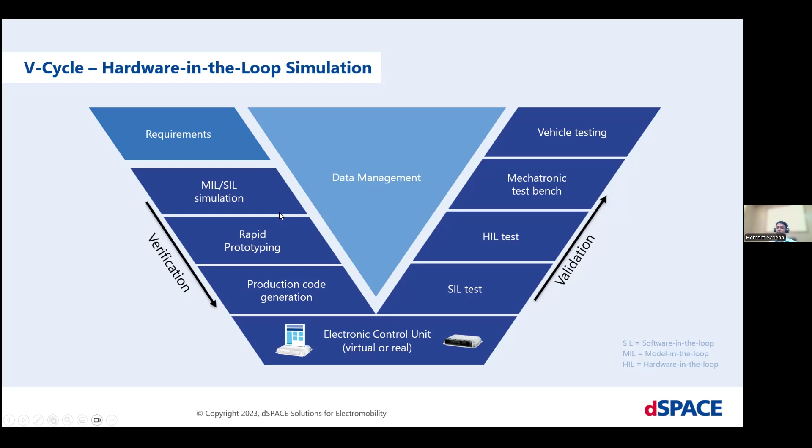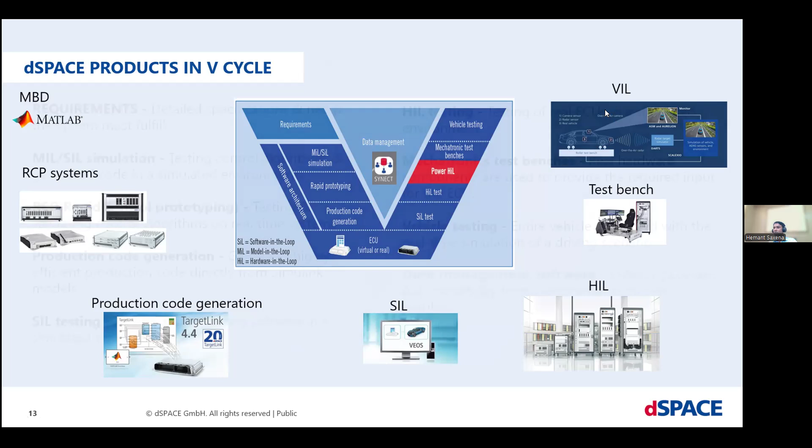Okay, hold a second. So first, what is the difference between MIL, SIL, and PIL? MIL stands for model in the loop, SIL stands for software in the loop, and PIL stands for processor in the loop.

This is usually done in simulation software. For this presentation, I am considering MATLAB Simulink, where both the controller and plant are available as Simulink blocks. When going for SIL, software in the loop, once the controller function is ready, you generate the code and run the controller in code format, while your plant model runs in simulation using the Simulink block set. That is called software in the loop.

In processor in the loop, your generated code is dumped onto an evaluation board, and the plant model is simulated on your PC. So depending on MIL, SIL, or PIL, your controller runs differently. That is the basic difference between MIL, SIL, and PIL.

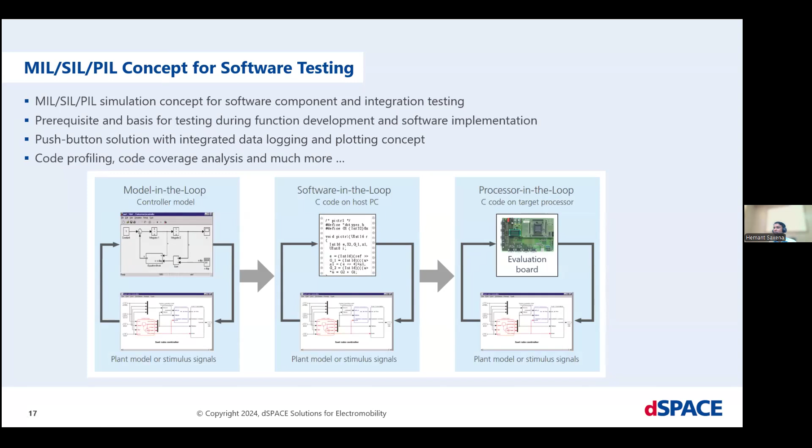I already explained MIL and SIL simulation. In RCP, rapid control prototyping, we test and validate the control algorithm. Suppose you want to run an inverter - it requires 6 PWM pulses for a 3-phase inverter, generated by a real-time system. So you run your controller in the real-time system with physical hardware present. That is called rapid control prototyping.

Then there's production code generation, where we generate C code for the ECUs. That is production code generation.

As I already explained, HIL testing is for testing purposes. Your controller is with you, but the hardware may not be available, or you want to test your controller within a safe environment. Suppose in a voltage source converter there is a DC link issue, like voltage dipping due to wrong switching operation - if you test with real hardware there is a safety issue and it can damage your hardware. But with HIL testing, there is no safety concern.

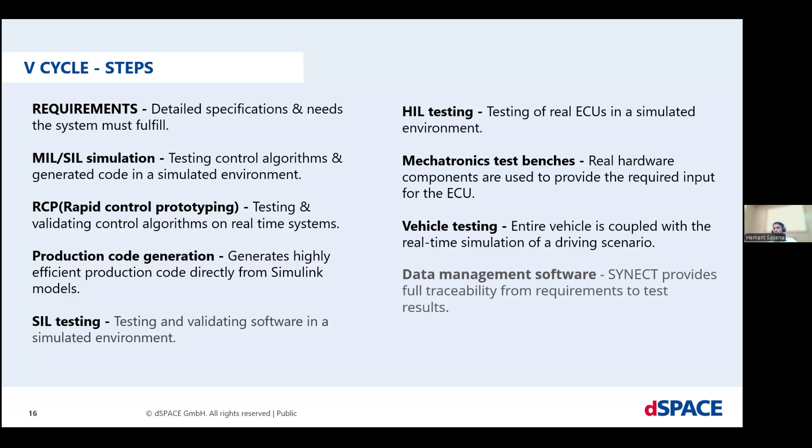In mechatronics test benches, real hardware components are used to provide the required input for the system - some part is simulated and some part is emulated with real hardware. In vehicle testing, the entire vehicle is coupled with a real-time simulation of a driving scenario. This is generally used for autonomous vehicles - the vehicle sits on test benches, and we create environmental scenarios so it can be tested in the lab itself.

Now coming to e-mobility, there are some identified trends. One is increasing power density - previously we used silicon-based switches, now it's changing to SiC based, and then to GaN based. So power electronics hardware or switches are becoming smaller in size with equal or more power.

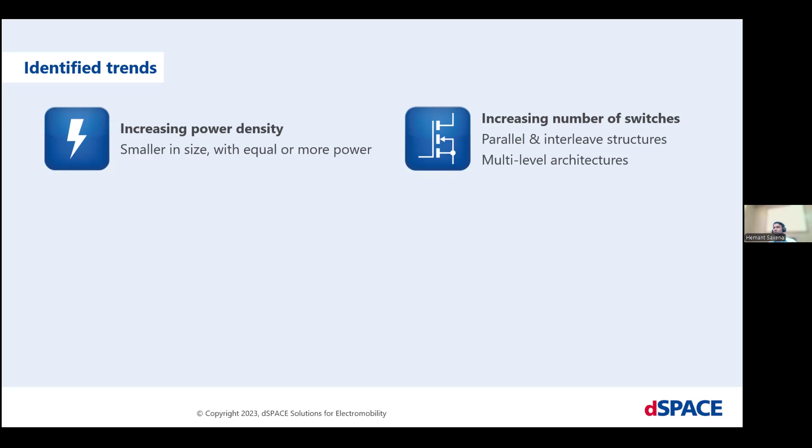Another trend is increasing number of switches. Those of us working in power electronics are developing new topologies, and with these new topologies there may be an increasing number of switches compared to standard inverters - like parallel and interleaved structures or multi-level architectures. Also, with advancement in material technology for IGBTs and switches, for DC-DC converters we are going beyond 200 kilohertz, while for drive inverters it's around 20 kilohertz, and the DC link voltage is increasing, maybe going beyond 1000 volts.

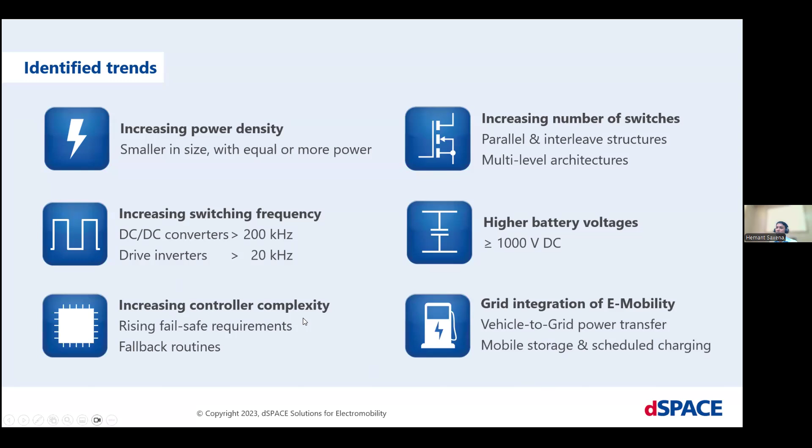Increasing controller complexity. Day by day controller complexity is increasing. So for that, we have to work on the rising fail-safe requirements, fallback routines, and there is a grid integration of e-mobility, like vehicle to grid or grid to vehicle.

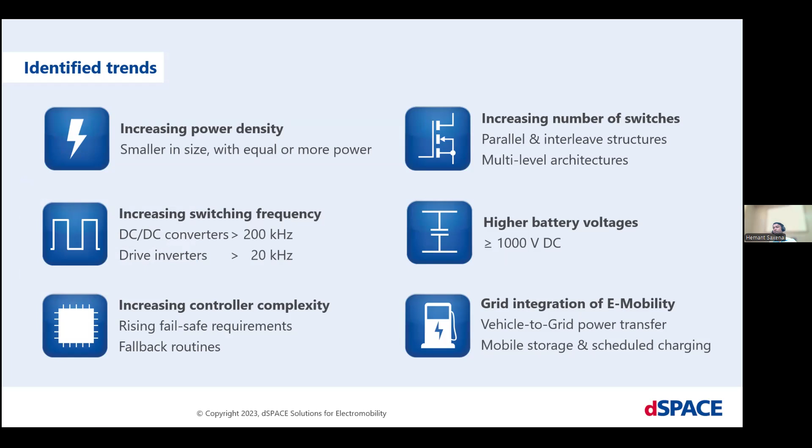These are the new identified trends industry is working on. Now I have discussed MIL, SIL, and other things. Now we'll discuss more about RCP.

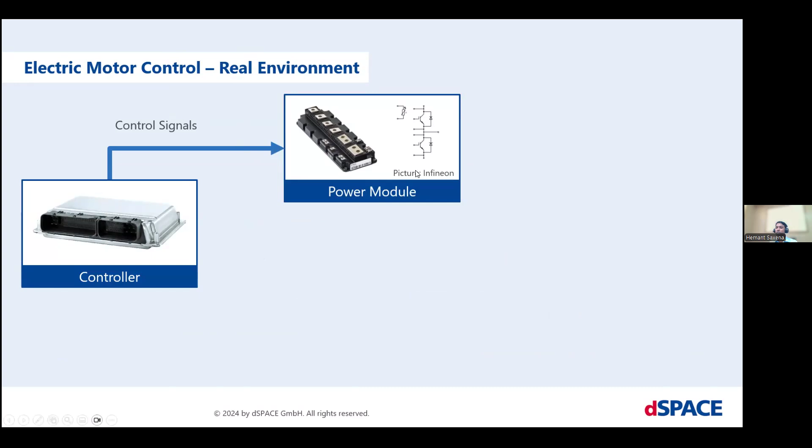Suppose I am taking one example for electric motor control. The real environment will be like there will be one controller which will generate control signal for your power module. It will be PWM signals, and it will control the voltage and the current, and then you can run your motor. Running the motor, you can detect the current and the position of the motor using sensors, and the measured signal will be given back to the controller. So this is the real environment for running a motor.

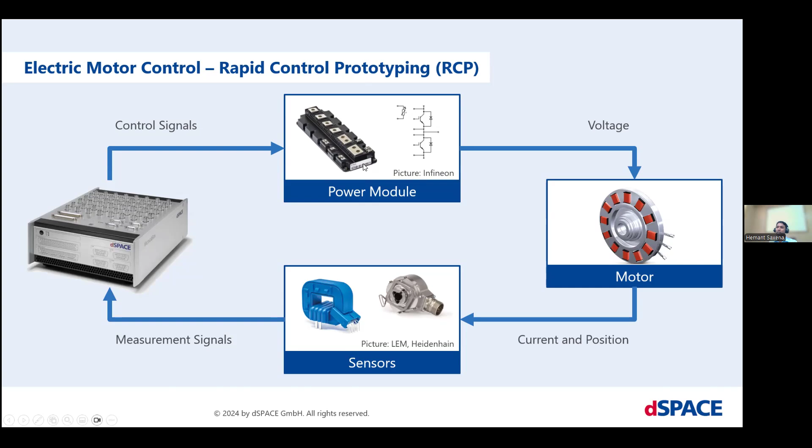But now what is happening here? We are going to simulate the controller model in real-time systems, maybe dSPACE, or others, and that will be called rapid control prototyping. In my experience in academics, most research uses these things - they develop new control logic and test their hardware with those newly generated functions.

First you are going to simulate your controller model and the plant model. If it is going good, you implement the controller model, then assign the channels like input and output, analog or digital, and implement this MATLAB model to any real-time system. Then you can load it to the ControlDesk - also our solution, the software for monitoring and tuning.

When we say monitoring, we measure the internal signal of your controller, or measure whatever output we are giving as input to the system - that we can measure also. And if you want to tune anything, you can tune it in real time. For example, using a PI controller, there will be KP and KI values, and you're not sure which value will work. So you can change it in real time and see the output of your hardware, how it is stable, whether it is working as per your requirement or not, so you can tune it also.

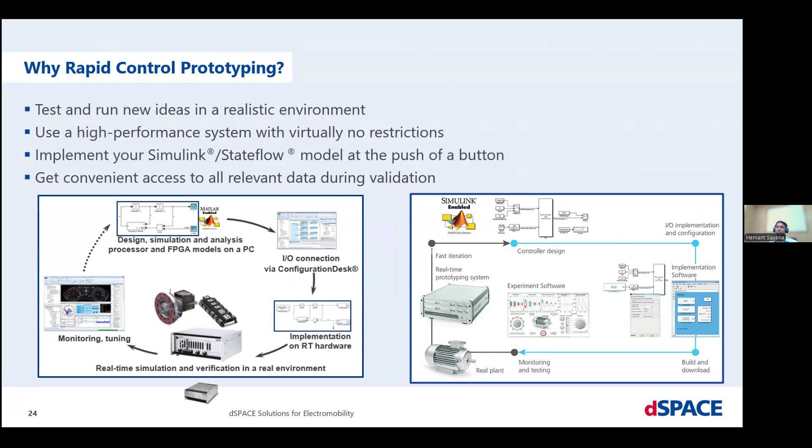Okay. I think we can take questions at the end of the presentation. Okay, that will be better. Yeah, no issue, sir, no issue. It's like in between, so that I can understand if people are getting it or not. Okay, that's okay, no problem.

This is one use case for rapid control prototyping - you can see the hardware for a three-phase active power filter, and we are going to develop some control algorithm. Suppose this is the distribution grid, and this is the non-linear load which is injecting harmonics. So how will this device help you do this?

Simply, what you have to implement is a sensor, and you should measure the source ABC current for all three phases, and DC link voltage, using sensors. This is very important, because here the voltage level may be 230 volt, DC link voltage maybe 400 volt or 800 volt, but any processor or DSP device cannot take this voltage, so you have to step it down and also isolate it. These signals are mainly analog signals, so you give them to the ADC channels, then process your control logic, and generate PWM pulses for the three-phase voltage source converter.

This is a different use case related to motor control, but in a similar fashion. You measure the voltage and current, the speed and position, and then process your logic, and it will generate control signal for your power module, which will control the voltage and current for the motor for optimal operation as per your requirement.

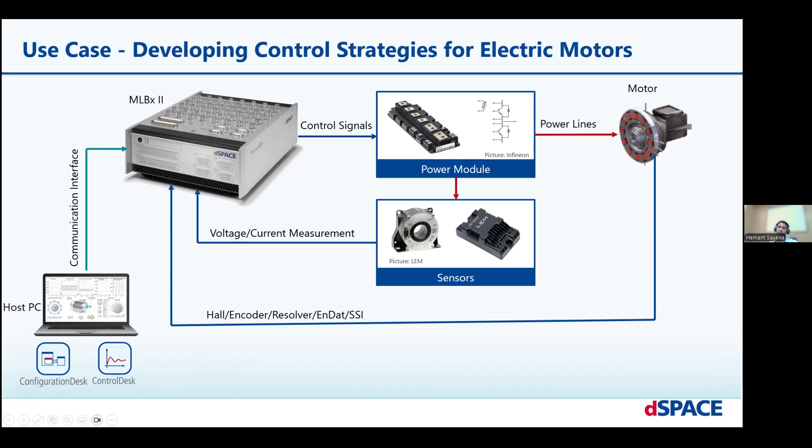Also, your laptop or PC can be connected to the MicroLabBox for monitoring and tuning purposes, or for controlling purposes, and also to do the channel assignment. Different channels can be assigned as per your requirement.

If we talk about the different products related to rapid control prototyping, there are different products here, like in-vehicle application or laboratory purpose. Those used for laboratory purpose can be used on the tabletop, and you can give supply at 230 volts. Those used in-vehicle will work with 12 volt or 24 volt.

What are the voltage levels available in your automobile? And those are very rugged, so they can withstand different vibrations also. So these are some of the features.

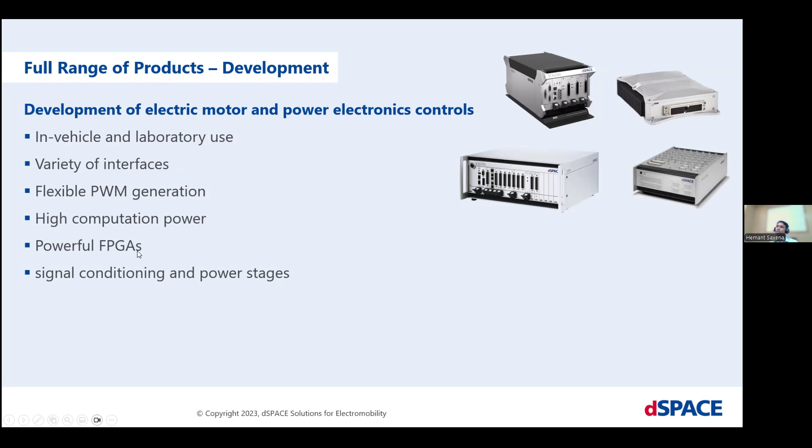For in-vehicle and laboratory use, there is a variety of interfaces, flexible PWM generation or high PWM generation can be done. Powerful FPGAs are there, so you can do very small sample time signal conditioning and power stages, and there is comprehensive software support to do all your operations.

If we see the different hardware and software, for the hardware side we have real-time hardware, and for signal conditioning we have RapidPro hardware. The voltage range is 6 volt to 30 volt, and it can go up to 60 ampere current, but you can stack it for a larger voltage and current range.

For the software side, we have implementation software related to managing the I/O channels. For example, the encoder generates A, B, and Z pulses, which are given back to our real-time system, and that converts them into position and speed. Also, the XSG AC motor control library and the XSG utils library are provided for implementation in the FPGA cards, and this implementation software is used for both the processor and the FPGA.

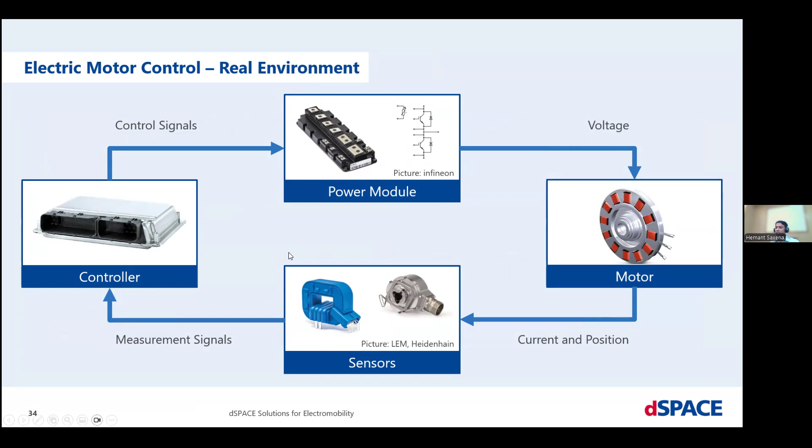Now the RCP part has been completed. Now what is hardware-in-the-loop testing basically? If you come to the real environment, again it's a similar thing, but this time you simulate the power module, simulate the motor module, simulate the sensor module, and your controller will be real, so that you can test your final controller, the product-ready controller, without any safety issue as per your desired test conditions.

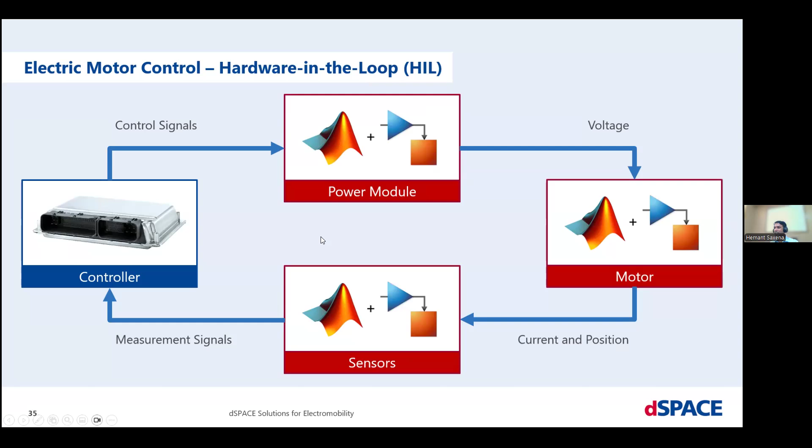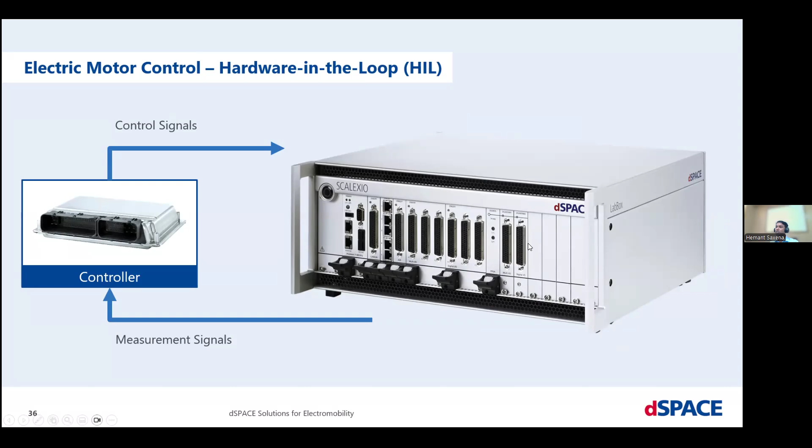So this is the Scalexio system. It can be used for both rapid control prototyping and the HIL system. When Scalexio is used for the HIL system, it will generate the sensor signals required by the controller, and it can measure the signals generated by the controller for actuation. It can also connect the output signal of the ECU to loads to simulate the actuators.

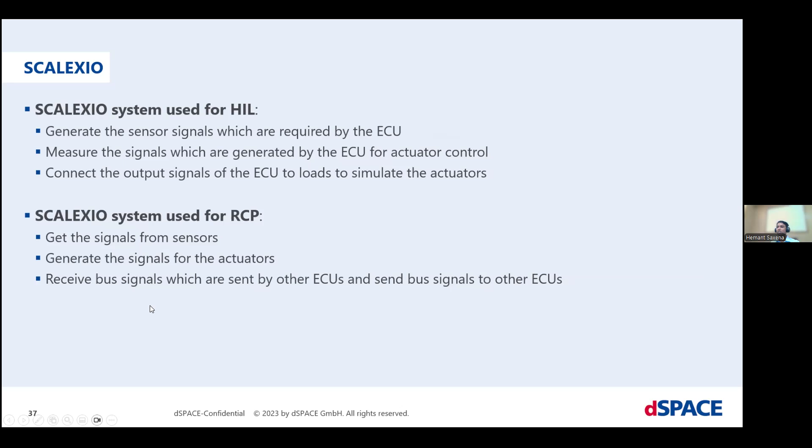In case of RCP, it will get the signals from the sensors and generate the signal for the actuators. It can also receive bus signals sent by other ECUs and send bus signals to other ECUs — in automotive, there are a number of ECUs in the vehicle, so it can simulate those too.

Now, why hardware-in-the-loop testing? You can test functions in early development stages, and tests are possible in any desired condition. For example, in an inverter case, you can do a short circuit test, or test in open loop condition also.

So a lot of things you can do without any safety risk. The tests are possible under any desired condition. Laboratory tests reduce time and cost. Tests in failure and other dangerous situations carry no risk. The tests are reproducible and can be automated.

So by Python coding, or by using different software like AutomationDesk, you can automate every test automatically. There is no need to do the manual thing. So like you are going to open MATLAB, all the things can be done by using the automation test.

Okay. So what is SCALEXIO basically? It is a modular real-time platform for hardware-in-the-loop testing and for RCP applications. It has a high performance processor and FPGA technology, comprehensive, precise and fast IO capabilities, and bus support. Bus support means CAN, LIN, Ethernet or other communication channels also.

So you can see here how the ECU testing has been done. This ECU has to be tested, so it will be connected to the different channels of this SCALEXIO system, and external loads can also be connected as per requirement. You can use your tester device to check the signals on the channels, and this device will be connected to the host PC simply by using Ethernet.

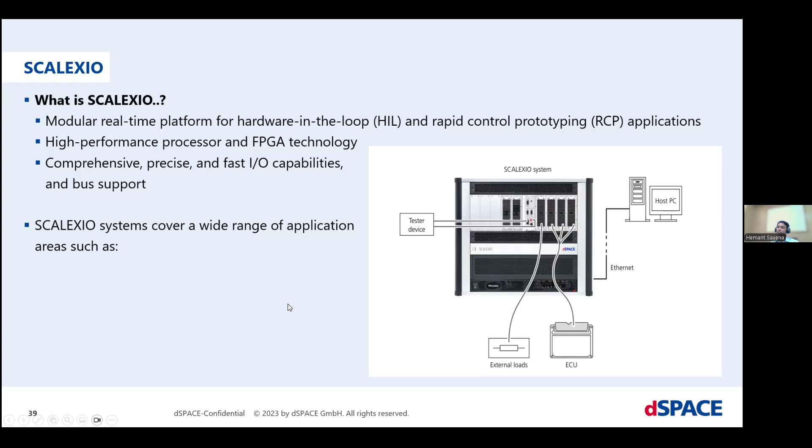Okay. So a different tool chain is used for the HIL testing. For the user interfaces, different software like ConfigurationDesk, ControlDesk, AutomationDesk, ModelDesk, and MotionDesk will be used to use this SCALEXIO hardware.

Also to simulate, there are two options here, VEOS and SCALEXIO. So your model can be simulated either in VEOS on the virtual platform, or you can run it in the real-time system, the SCALEXIO system, and its IO can be connected to the ECU. Okay, so this way it can be done by using the dSPACE toolchain. I will explain some of the software which is required for the HIL testing.

So the first software is ConfigurationDesk. ConfigurationDesk will be used for two purposes basically: first for the channel assignment, and for those channels their function assignment. Simulink, FMI, and virtual ECUs can be integrated. Simulink, like MATLAB Simulink, you can integrate. FMI is the functional mockup interface. Other simulation software can generate the FMI file that can be integrated into ConfigurationDesk.

Also, there is a provision to integrate the virtual ECU, and multi-model capabilities. So you can integrate multiple models, and also for multi-processor systems, if you want to integrate some model in one processor and some model in a different processor, that is also possible. Better overview, multi-selection: you can select multiple channels at a time and assign their functions at a time also. You can see every channel, where it is connected, and what the configuration for those channels is with ConfigurationDesk.

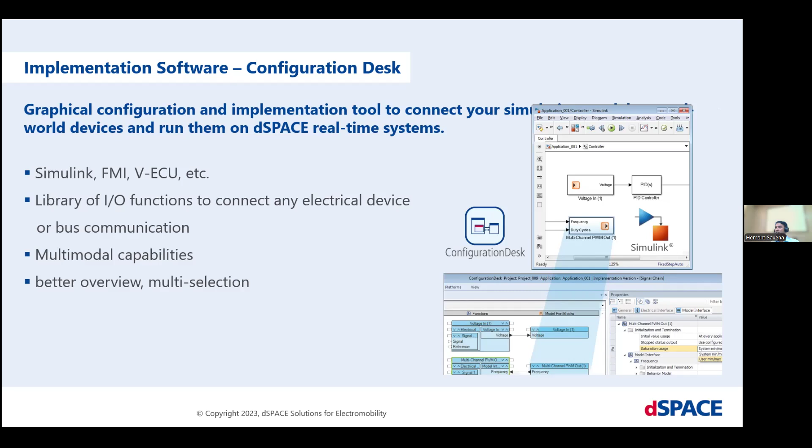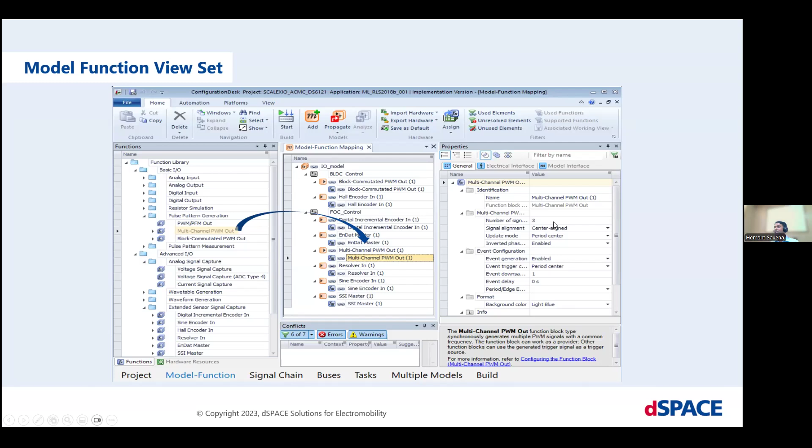Okay. So here is some view of ConfigurationDesk. Here you can see there is a function list. For basic IO, maybe analog input, analog output, digital input, output, resistor simulation, for PWM generation maybe the PWM generator, or you want to generate multi-channel PWM. So there are a number of functions available, and these functions can be assigned to specific channels. If you want to see the properties, you can see them here, and you can change them as per your requirement in the configuration.

When you come to ControlDesk, like I already discussed, this is for monitoring and tuning. It's basically the experiment software for seamless ECU development or testing, and it performs all the necessary tasks and gives you a single working environment for instrumentation and simulation control. So once your model is developed and you are going to test the function, ControlDesk will take care of other things also.

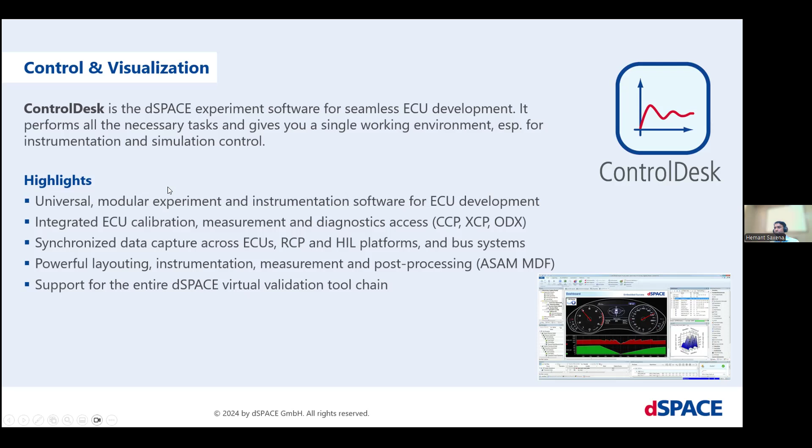Okay. So when we talk about HIL testing, there will be two approaches: either signal level HIL or power level HIL. So first I will explain the signal level HIL. There is a use case for the electric motor. For simulating electric drives on the signal level HIL, there is an inverter, there will be a motor, and there will be some mechanics in the automotive.

So there will be no actual current. Suppose that the motor is taking 15 ampere. You will not get 15 ampere. It will be scaled down to a voltage like 10 volt, maybe up to 30 volt, depending on the different system. So this will be the signal level testing.

So what functions can be simulated in the real-time hardware? There will be interfaces, like digital in, analog out, or as feedback it can take analog or digital input. And you can simulate the PWM measurement, inverter, motor, mechanics, position sensor, or any scaling for the sensor. So that will be the signal level.

Okay, so you can see here, this portion will be in your ECU. This complete portion, like inverter, machine, and the mechanics, if you are going to simulate it, that will be the signal level. Now, if you are simulating the electric machine and the mechanics, and you have the real inverter, that can be simulated with the power level HIL.

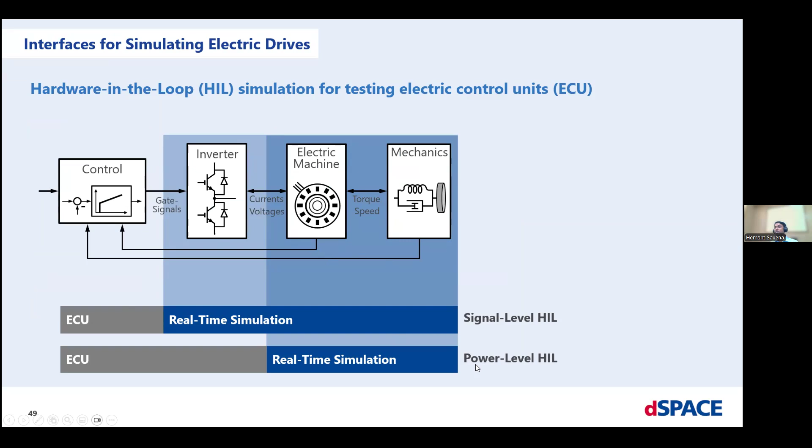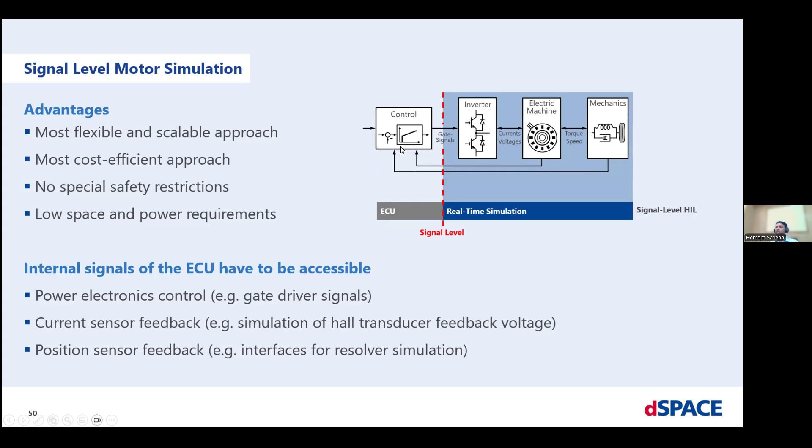And for signal level HIL testing, there will be some prerequisites. We need internal signals from the ECU. For the power electronics control, we need the gate driver signal from the controller, and also we need current sensor feedback that can be given to the controller, or the position sensor feedback that can be given to the controller. So these channels should be accessible from the controller side. Okay, this is the same slide.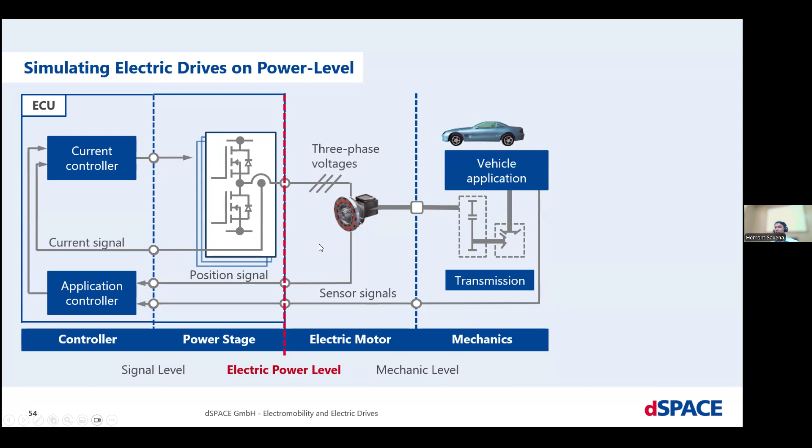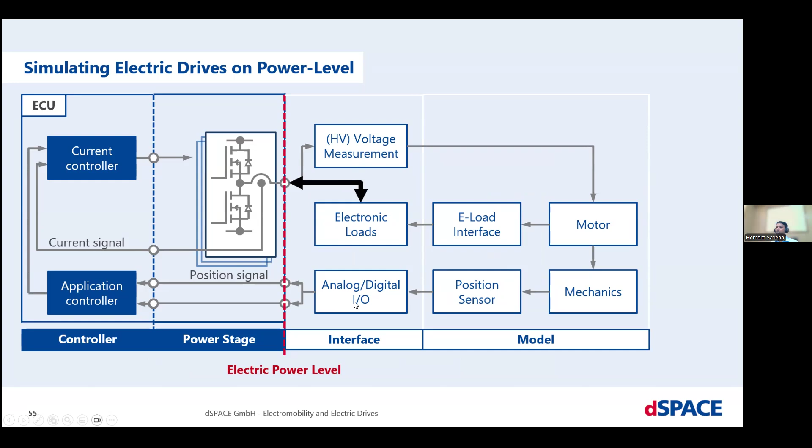Now when we come to the power level HIL, the situation will be the same, but up to this point it should be real, and these portions will be simulated, and these are the functions that can be simulated with the real voltage and current. So high voltage measurement will be there with our power HIL, or we can simulate the loads or the e-load interface, motor, mechanics, position sensor, and convert the analog input and output digital signals that can be given back to the controller. So this will be power HIL.

So there will be different advantages. You can see in the signal level and the power level we are doing almost the same testing, but the voltage and current will be higher. So what would be the advantages? Higher test depth, and the same interface as signal level can be used. The same software used during the signal level can be used, and the interface will be the same. Just the inverter part will be with you.

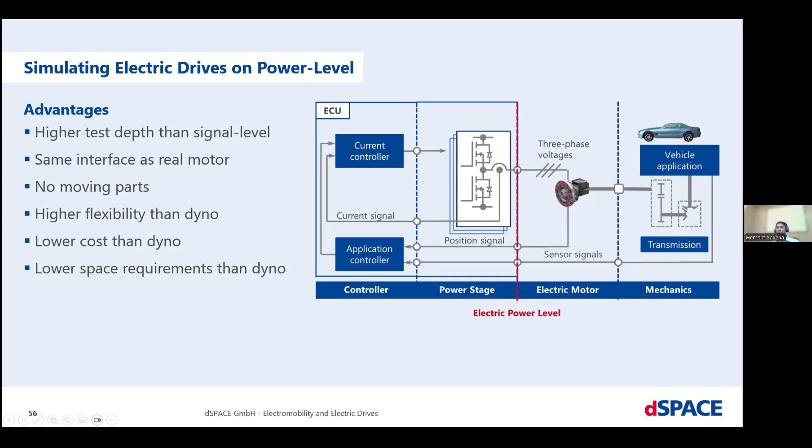There will be no moving parts, higher flexibility than a dyno, and lower cost than a dyno. Lower space is also required, so it will be laboratory based. You can do it on a tabletop basis.

Okay. So now we come to the different solutions which are required. Real-time models will be required to simulate anything. So you need models for, suppose, the motor: PMSM, separately excited synchronous motor, BLDC, induction motor, synchronous reluctance motor.

We also support multi-phase drives. Different position sensors can be simulated. And for the hardware side, we have a cutting-edge processor, flexible I/O concept, and high-performance Xilinx FPGA technology. So we use Xilinx-based boards like Kintex-based boards, for the Kintex 7, Kintex UltraScale or Kintex UltraScale Plus. So different boards are available.

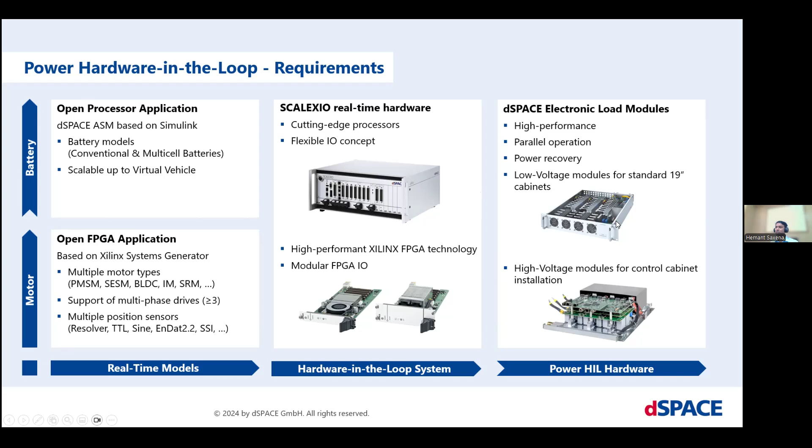These are load modules which can be used for the power HIL. So high performance, parallel operation, and power recovery are also possible with our power-level HIL testing. And if you want to simulate the battery, we have a battery model also, so you can configure different cells in series and parallel combination. So these are the real-time models, or the library you can say. This is the hardware side, and this is related to the electronic load modules for the power-level HIL.

So this is one figure for very large requirements. The motor and battery emulator can go up to 250 kVA, more than 1000 volts, and it can go up to 600 A. So these are basically power electronic switch-based emulation, and you can test your controller here. There is one DSO for other measurements. So this is a system for the power-level HIL.

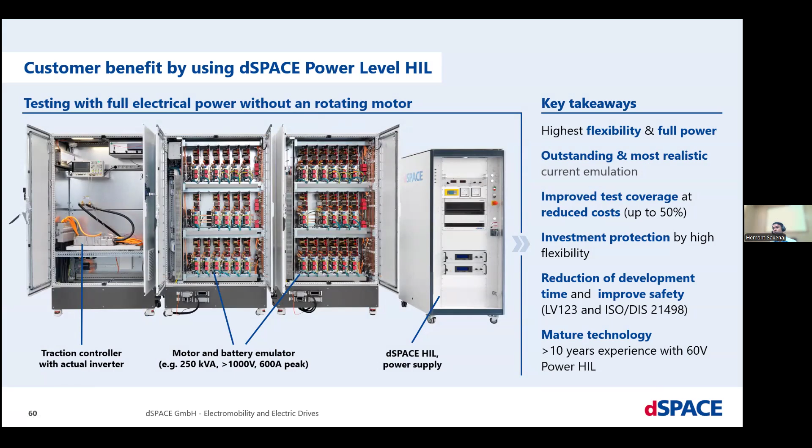Now we discussed the difference between the signal-level HIL and the power-level HIL. But when we are simulating the real-time model, there are two possibilities: either we simulate in the processor, or in the FPGA. On the processor side, the sample time can go down to microseconds, but in FPGA it can go down to nanoseconds. So FPGA will give more precise simulation, but there will be some challenges to develop the model for the FPGA.

Hemant sir, we can start now. Hold a second. Yes, sir. Am I audible? Yes, sir. Great.

So till now we have discussed different terminology, basically MIL, SIL, PIL, and HIL also. In the HIL case, we discussed signal-level HIL and power-level HIL. But for all these things, we have to simulate our plant model or controller model on real-time hardware. Real-time hardware may be processor-based simulation or FPGA-based simulation. Now I will discuss what processor-based and FPGA-based simulation are, and when we have to use each. So processor-based simulation.

So we have different solutions. This is one SCALEXIO EMS solution that can be used for different functionalities. We have a different ASM electric components library. Some libraries are already available through the MATLAB Simulink blockset, but we also provide a library for the automotive domain. It's not related only to the motor and the controller; we have different parts in any vehicle. So we provide the engine library also, which is not available in MATLAB Simulink.

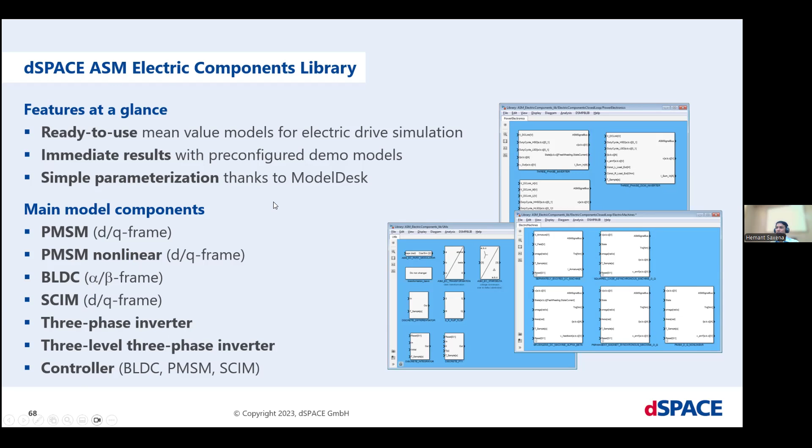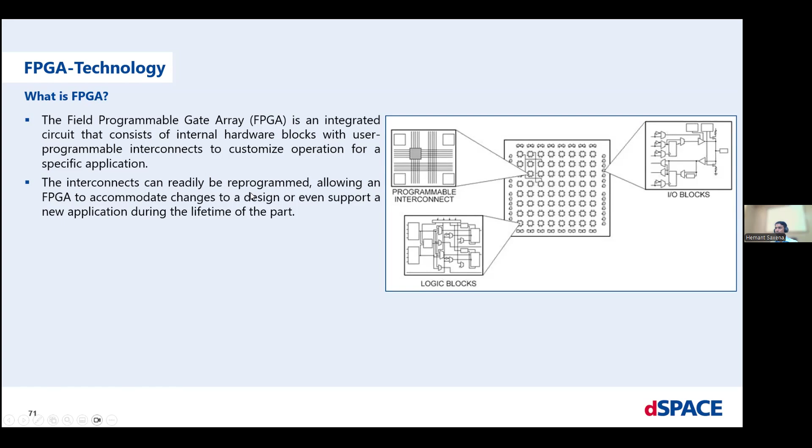So what is FPGA? It's a field programmable gate array, an integrated circuit that consists of internal hardware blocks with user programmable interconnects to customize operation for a specific application. So suppose that this is one FPGA board. You can see there will be a number of configurable logic blocks, and it has different D flip-flops and other things also. It's programmed by using the VHDL code or the Verilog code. There will be some IO blocks for the input-output block sets.

A basic FPGA architecture consists of thousands of fundamental elements like CLB blocks, IO blocks, and other blocks also. The capacity of an FPGA depends upon two things: their clock rate and how big a program can be implemented over the FPGA. So if you want a bigger, larger model, you need a larger number of configurable logic blocks.

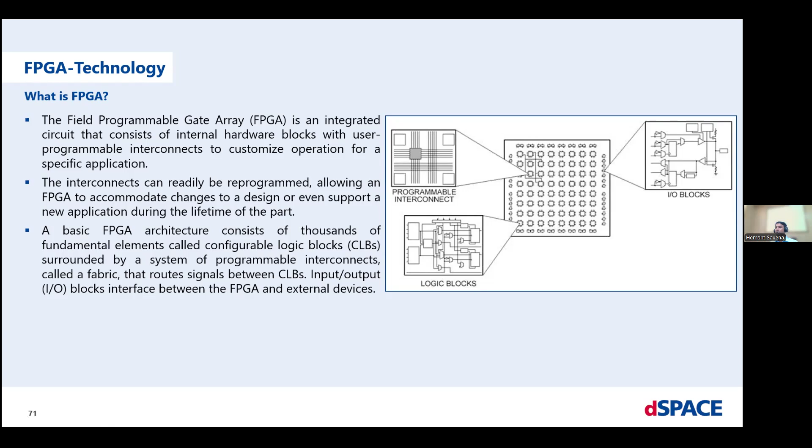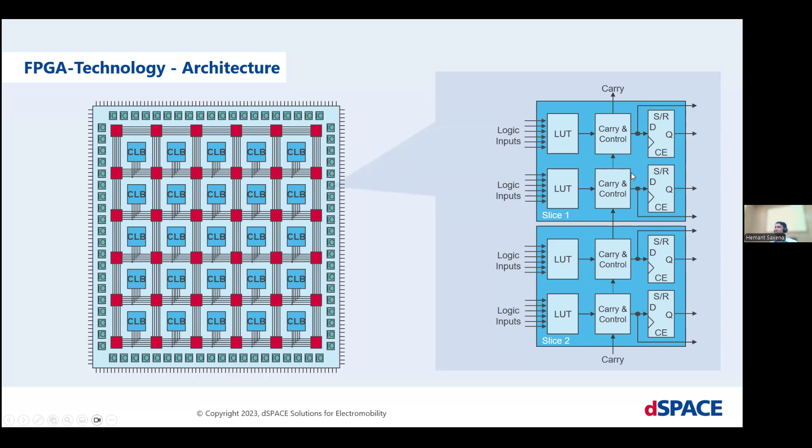So you can see here, this is the complete architecture of an FPGA. These are the configurable logic blocks, where the logical, arithmetic or mathematical operations will be done. And this programmable interconnect will be connected through the HDL program as per your logic requirement, and these IOs can be configured. So for the CLB blocks, each CLB block has 2 slices. Each slice consists of 2 lookup tables, 2 carry and control blocks, and 2 D flip-flops.

When we are doing the processor-based simulation, we need MATLAB Simulink block libraries or other libraries, which are in C code, MATLAB code or S-function code. But when you are going to run the controller or the plant in the FPGA, you need the library provided by Xilinx, because the card is from Xilinx. It has over 100 blocks available, and you can design in a very basic way. So there are very limited blocks available, over 100 blocks, which is very limited.

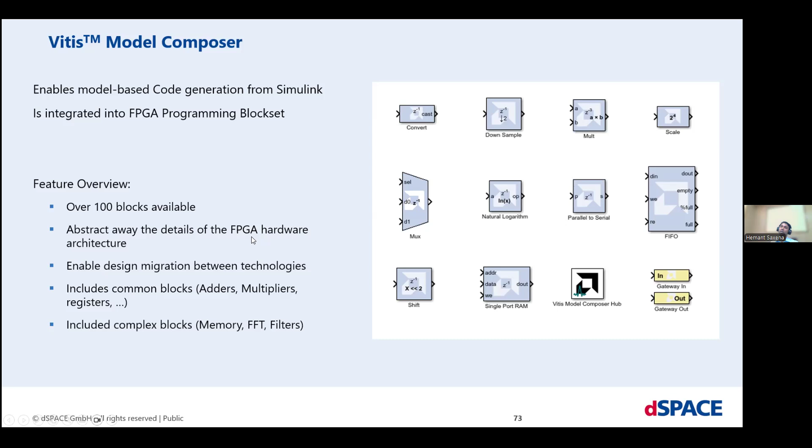Suppose that you want to generate a PWM. In MATLAB Simulink, you can simply get a DC PWM, or you can get a repeating sequence and compare it with a constant to generate the PWM. But when you are going to use FPGA based simulation, you have to take a basic block like a counter, so that you can limit your counter from 0 to something, generate a repeating sequence or sawtooth wave, and then compare with the constant to generate it. But this portion will work down to 10 nanoseconds, and in the processor it can go to microseconds.

So here you can see the different application areas. If you are going to work with FPGA based computation or simulation, it can go to the nanosecond to microsecond range. And processor based simulation goes in the millisecond to microsecond range. So what are the advantages of FPGA? Why is it better for faster processing?

FPGA offers parallel computation with low latency and high resolution IO signal processing in the nanosecond range, while processor based simulation is serial computation. Sample times of FPGA-based real-time applications can be shifted down to the microsecond to nanosecond range. So their channels are also faster with very high precision. So when is it required? Suppose that you want to work on some controller, or generate PWM, and your PWM is more than 20 kilohertz. For 20 kilohertz, your sample time will be 50 microseconds.

But with 50 microseconds, you cannot generate a PWM, because by the Nyquist criterion it should be at least more than 2 times. Even if it is more than 2 times, you can generate a PWM for up to 50% duty cycle only. But suppose you want to generate 51%, that isn't possible with processor-based simulation, because it works in the microsecond range.

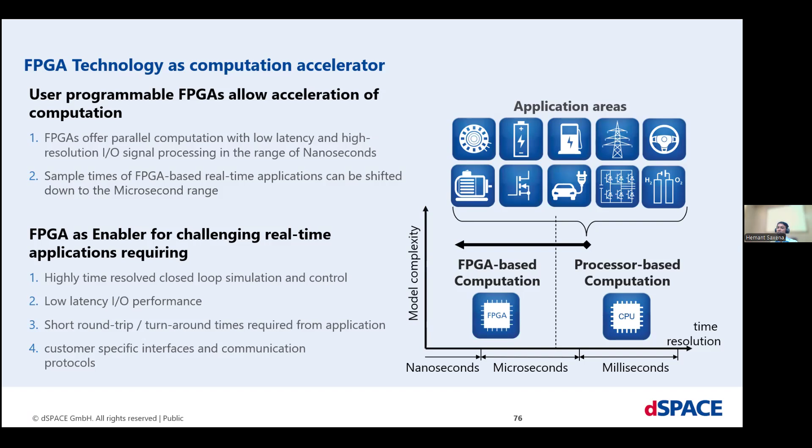So whenever your sample times need to be very low, you should use an FPGA. When a low sample time is not required, you can choose processor-based simulation only. So it depends on what precision is required in your case. You have to choose between FPGA and processor-based simulation.

So how can it be done with the dSPACE software? Previously we discussed the host PC connecting with our dSPACE system. But in the case of FPGA, there will be two portions: one is the processor-based simulation, and one is the FPGA-based simulation. Here you can use MATLAB to make your model, or in the case of the FPGA cards, you can use the Xilinx-based library to implement it.

Also, you can transfer signals or data from processor to FPGA or FPGA to processor. And you can use any of the IOs: on the processor side, the fast IO, and on the FPGA side, the very fast IO. So things which should be simulated in the microsecond or millisecond range you can simulate in the processor, and the portions which require very fast switching, like in the nanosecond range, you can run in the FPGA, and signals can be transferred between processor and FPGA.

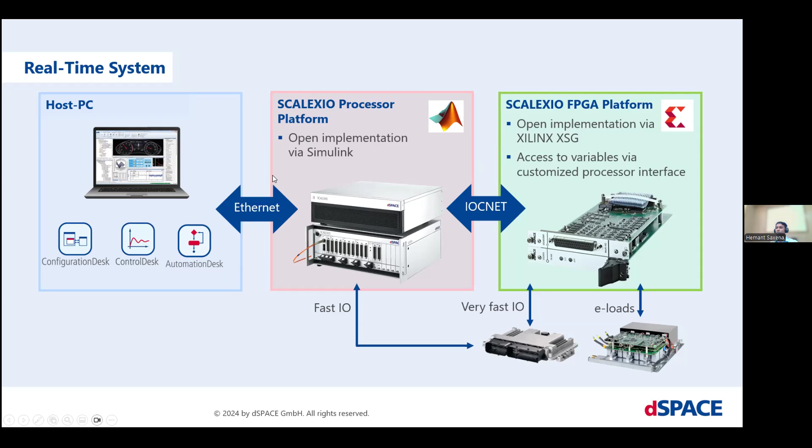So both options are there, and this can be done with a single model approach. This is the configuration for the FPGA-based or processor-based implementation. So what tool chain will be required? For the FPGA, you need a high-level visual block programming language, so you need the AMD Vitis Model Composer library. These are the libraries from Model Composer.

Second, you need some libraries from the dSPACE side so that you can assign the channels. The channel assignment cannot be done with the ConfigurationDesk here; you have to do it in the modeling part itself. Also, previously in the slide I showcased modeling using the library. Now, if you want to implement your own code, that is also possible. In that library there is a block set, the black box, where you can run your code and it can be converted. So HDL code integration is also possible.

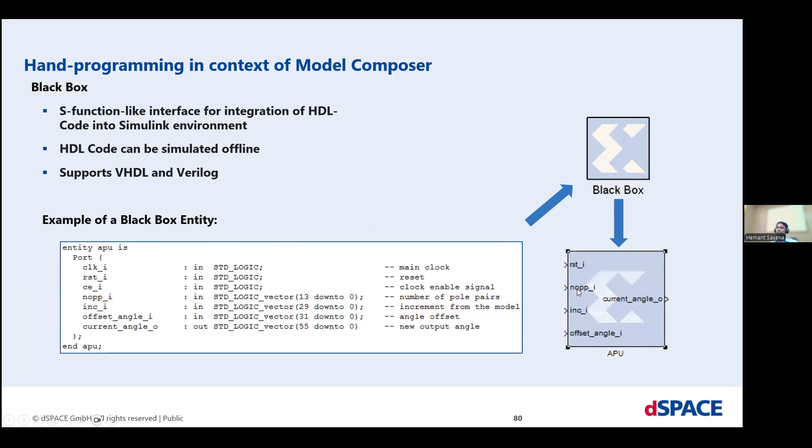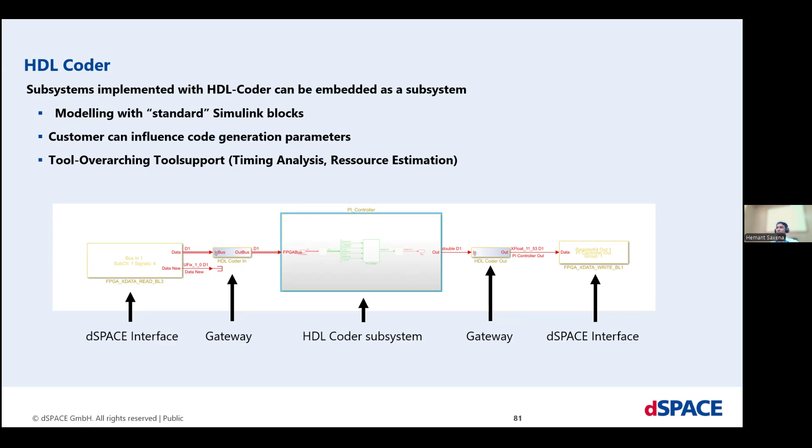And if you want to use HDL Coder, it is provided for Simulink models, where you can implement Simulink-based block sets for the FPGA. There will be some licenses required to convert the Simulink model for HDL-based implementation. So three ways are possible: either you use the AMD-based library, or you run your HDL code, or you use the Simulink block set from HDL Coder to implement in the FPGA. So three possible options are there.

Here you can see different FPGA hardware, and the user can design using the AMD library. There are also some solutions like XSG Utils and XSG AC Motor Control. These are libraries made by dSPACE. Suppose that without ACMC or XSG Electric Components you want to simulate a motor in the nanosecond range; you would have to make your model using these very basic libraries, which would be quite difficult or challenging.

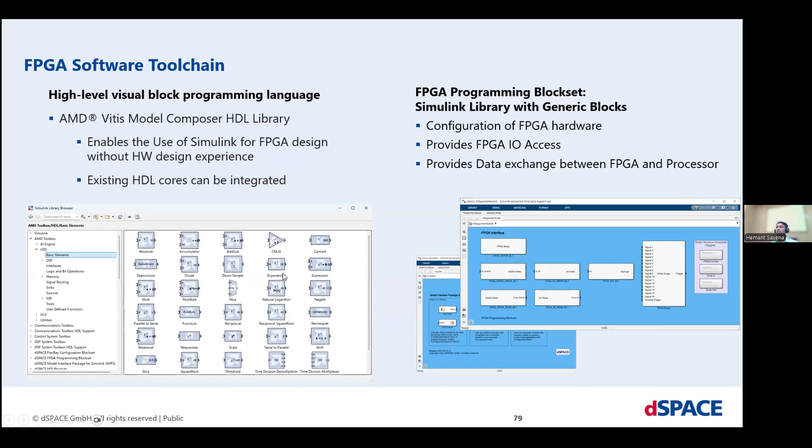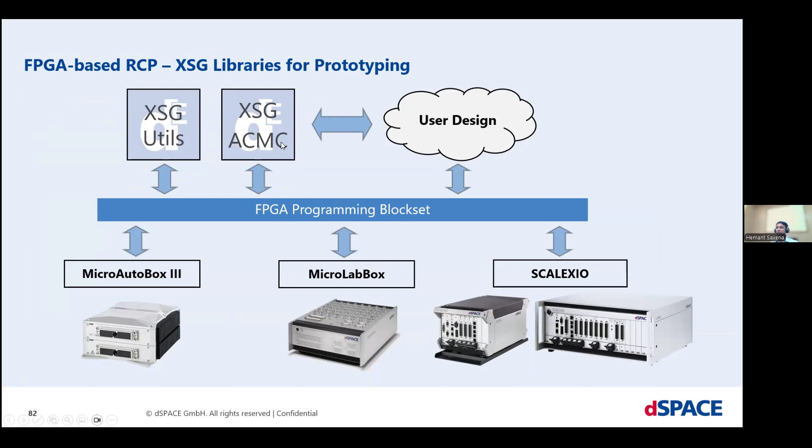So FPGA also works with model-based engineering. We provide different libraries for the FPGA, like libraries for simulation-based implementation. As we have shown, ASM Electric Components was processor-based, and XSG Utils, XSG ACMC and XSG Electric Components are the FPGA-based libraries. Okay, so some tools are required if you are going to work with the FPGA. From the AMD side, we need Vivado ML Enterprise Edition, and maybe the Standard Edition also.

Depends upon the boards, like what boards we are using from AMD. We require Model Composer, which provides the library from AMD. We also require MathWorks tools - Simulink is required, and the fixed point designer tool is required for higher bit sizes, with HDL coder being optional if you want to use it. From the dSPACE side, we provide the FPGA block set, and XSG-based solutions are recommended. These are the libraries you can model with. If you cannot model it, we can provide the model also. So these are the software solutions if you want to work with FPGA-based systems.

So this is one testing motor control unit for the signal level with the FPGA. We are going to simulate our plant model using the DS6601 FPGA board, and we are going to use the channel of the DS6651. So these are the numbers of our different boards for different applications.

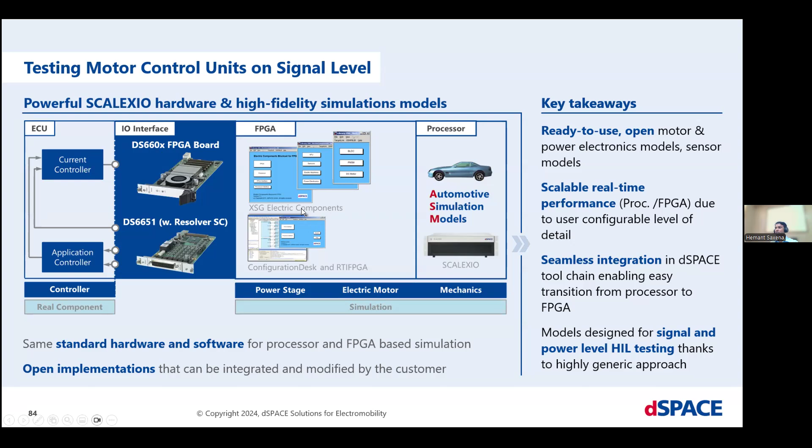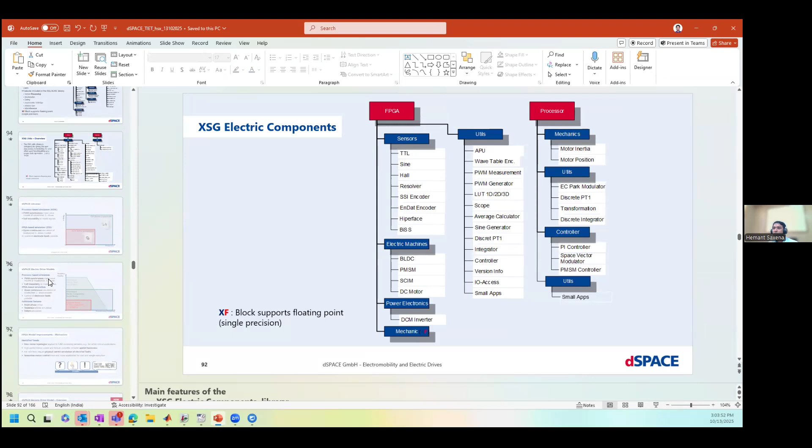These are different libraries related to the motors, motor simulations. These are the different library solutions available related to FPGA-based implementation.

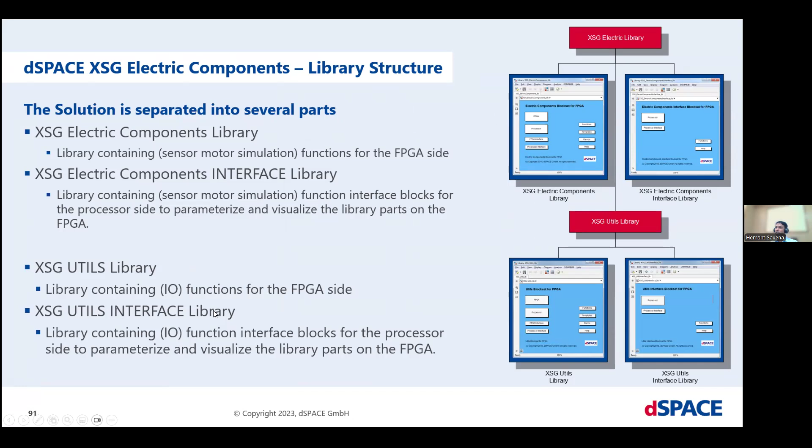So like XSG electric component and for interface - the XSG electric component interface and the XSG utils interface. This will help you to communicate between the FPGA and the processor, and processor to FPGA. These are the libraries available with the XSG electric component, like sensor simulation, electric machine simulation. DCM inverter is available, and other basic blocks are also available to integrate with the FPGA.

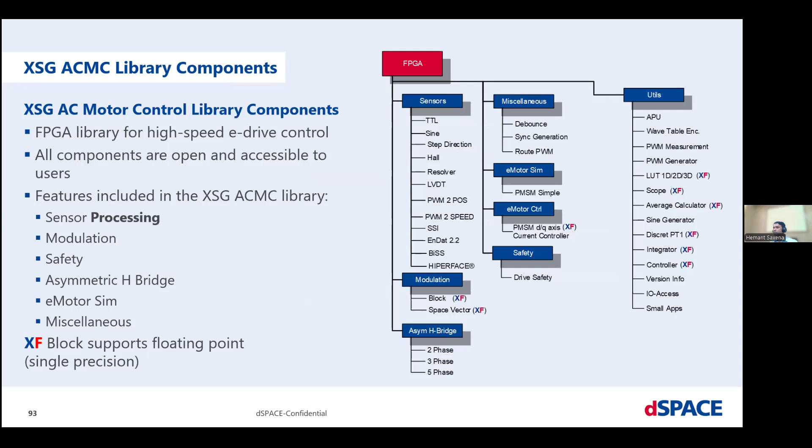So these are other solutions. With this, I am closing the presentation part, and I also made one model to show how to do that - maybe I can showcase you.

Okay, so I have given one example, maybe on top of that. Yeah, this example - I have implemented this portion with our newly launched device, that is MicroLabBox II.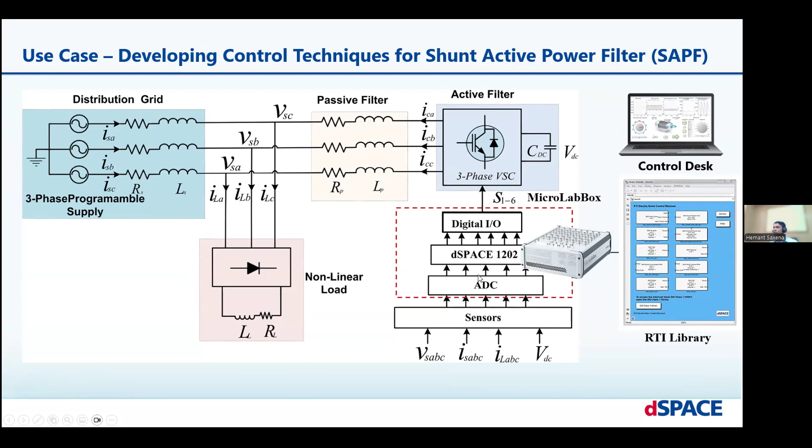I am simulating all the things, along with the controller also in this MicroLab Box 2. So this is my complete model, what I have showcased in the presentation. This is the distribution side, this is the load connected - non-linear load is connected. I am switching here from some constant block, and there is a linear load also - linear lagging load is here, switching after some certain time with the square wave generator. And I am using one

statcom for the active power compensation. I took one remote PC for that portion, for real-time implementation.

So this is the ConfigurationDesk, as I explained during the presentation. If you go to the model function, these are the functions that can be implemented with the ConfigurationDesk. There are a lot of functions that can be used for RCP and for HIL level testing. I have added MicroLab Box 2 here.

So it has, you can see, a greater number of channels - analog in 23 to 24 channels are there. If you click on analog in 23, you can see their properties - the voltage measurement range is -10 to 10 volt. Whatever channel you click, it will show their properties and assignments. MicroLab Box 2 has 32 ADC channels, 16 DAC channels, 48 digital I/O channels. Apart from that, more differential digital channels are there for motor-based implementation.

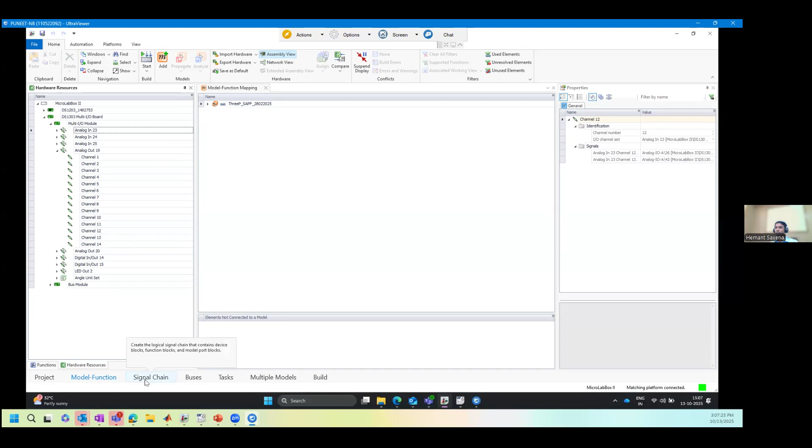If you go to the signal chain - I have one model, like 3-phase active power filter, and we have assigned some channels for this. Suppose if you want to take some result over the DSO, these channels have been assigned to measure the voltage and current on the DSO, so that you can take the result and put it in your research papers.

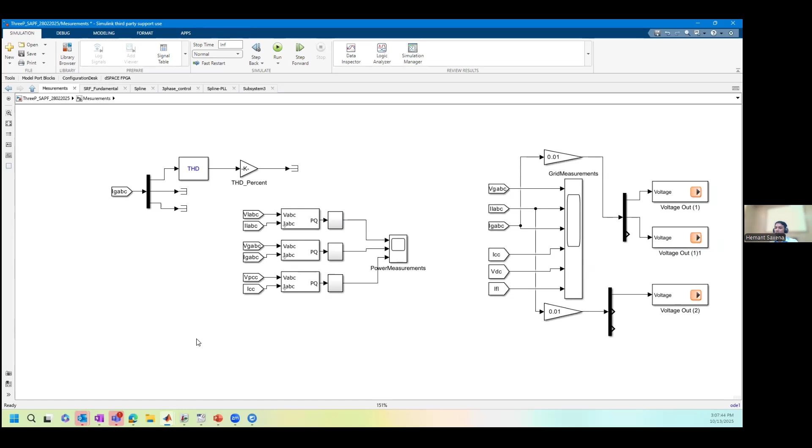Okay, once everything is completed, you can simply go to the build and click on build. It will generate one SDF file that can be loaded to different software, like for the control desk, that is for the monitoring and tuning.

You can see here that the 3-phase SAPF SDF is loaded here, and I'm going to click on go online and start measuring. And yeah, you can see the platform. MicroLab Box 2 is connected here, and we are running this application.

You can see this. This is the voltage you can monitor here. This is the load current, which is non-linear, and then this is the compensated source current. So we are reducing the THD value.

Also, we are measuring the turnaround time. Basically, turnaround time is how much time it is taking your model to run one complete execution. Currently it is taking around 3-4 microseconds with this complete model related to the three-phase shunt active power filter.

Also, for the DC link, here you can see the load is changing from 30 ampere to 38 ampere, and that is by using this control. I can share with you over the model.

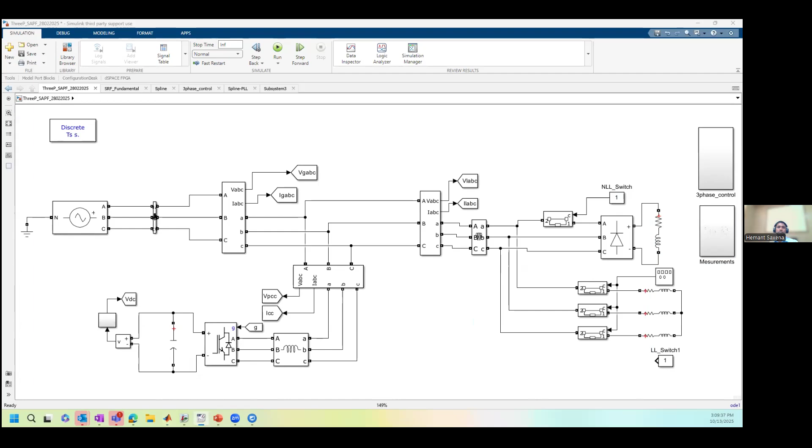So from here, we are just removing the load, complete load, so that the load is changing. Okay, hold a second. Yeah.

Also, suppose that if we want to switch something like a non-linear load, currently it is 1. If I click on 0, the non-linear load will be disconnected here.

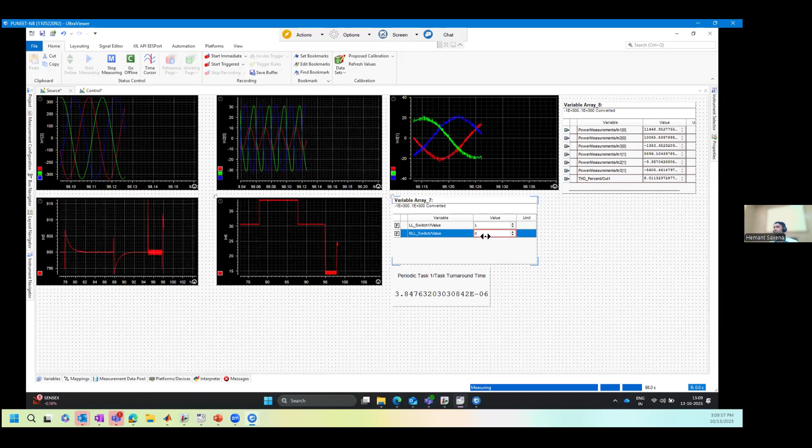So it means we are measuring here and we are tuning here. Tuning means we can change any parameters. And if you go to the control portion, you can change the control also, like I have added the KP and KI controller for controlling the value.

So suppose you can see here, we can increase the KP and KI value, and in that way the response of the DC link voltage will change.

And yeah, THD, you can see it's coming almost 5%. Maybe we can tune this model more, then we can get less than 5%. But it will depend upon the various parameters.

Okay, so this is all from my side. Now I'm ready to take questions, or maybe we can discuss now.

Any questions, sir, from the participants? Let me start, sir. I have a small question. What is the difference between OPAL-RT and dSPACE?

Okay sir, I don't know much about OPAL-RT, but I can answer about dSPACE since I was a dSPACE user. OPAL-RT has promoted their product related to HIL testing, but in academics we promoted our product as rapid control prototyping, because mostly it was used at RCP. But in case of HIL testing, we will say we are pioneers in industry, not just in India, in other countries also, it's only how they are promoting the thing.

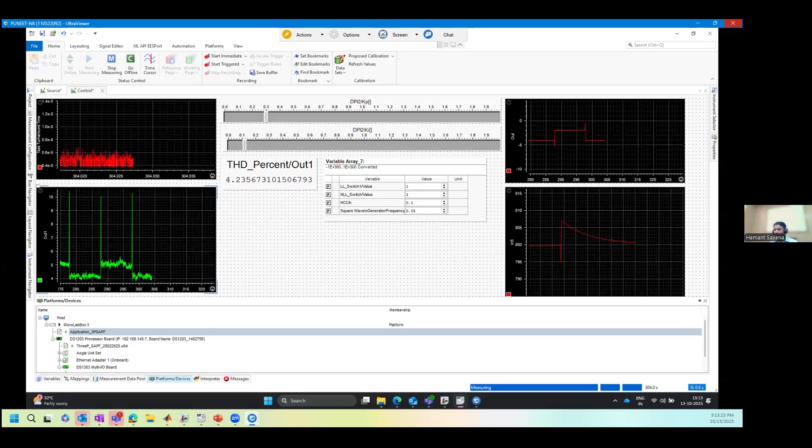Yes, for the Simulink side, when you install MATLAB Simulink, there will be a lot of tools there. Maybe I can show here. Suppose that this is MATLAB, right? So if you go to that version, okay, you can see these are the tools related to MATLAB Simulink.

But most of the time in academic institutes, they purchase most of the tool chain. But in our case, we require four things: MATLAB Coder, Simulink, and Simulink Coder, okay, from the MATLAB side. MATLAB Coder, Simulink, and Simulink Coder will be sufficient for installing dSPACE.

Yeah, actually MATLAB is required for your model development. Model development, yes, and other libraries are optional, depending on your use case. Suppose if you want to use the SimScape electrical system, then you can go for it. Otherwise, just Simulink will be sufficient to model anything.

Akashdeep, any question?

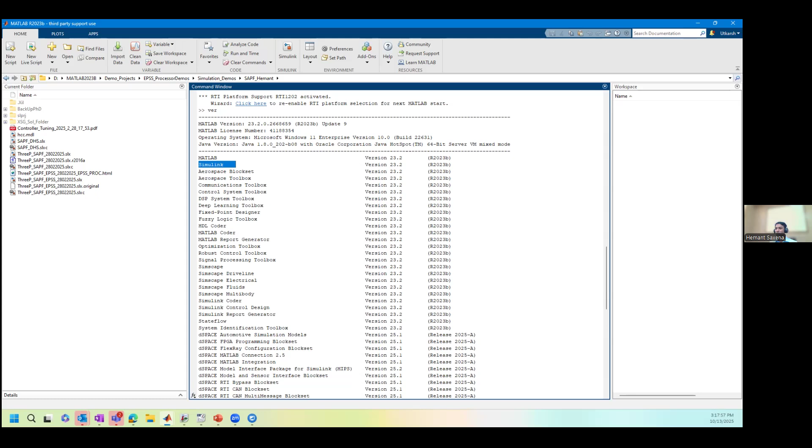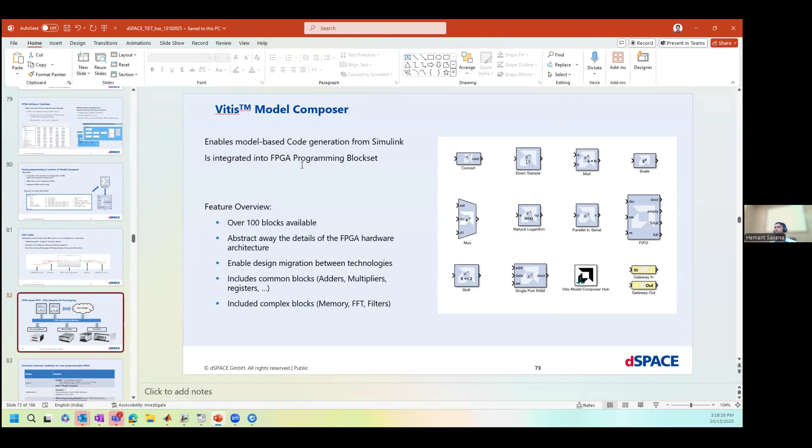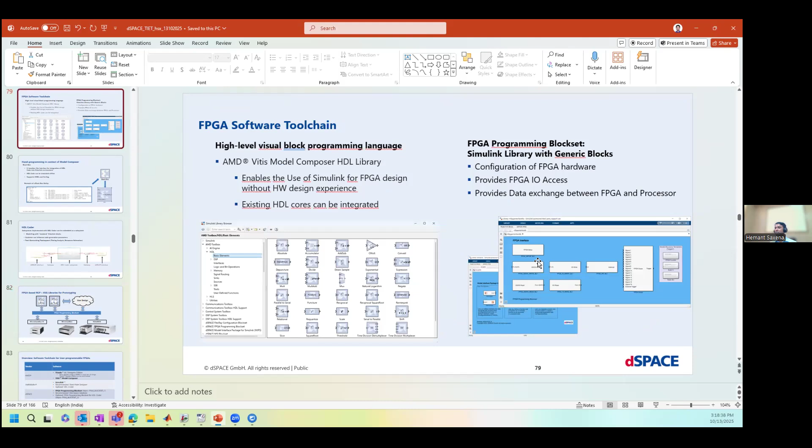Yes, this is RTI-based library, which can be integrated with MATLAB Simulink, and these are basically AMD-based libraries.